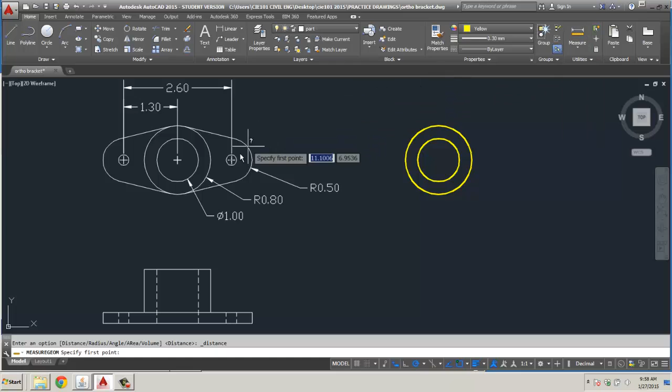They didn't put a diameter here, so let's measure it. Here's our measure tool - I can measure distance. From this corner to this corner is 0.25, so it's a quarter inch hole. Shame on them for not putting it in there.

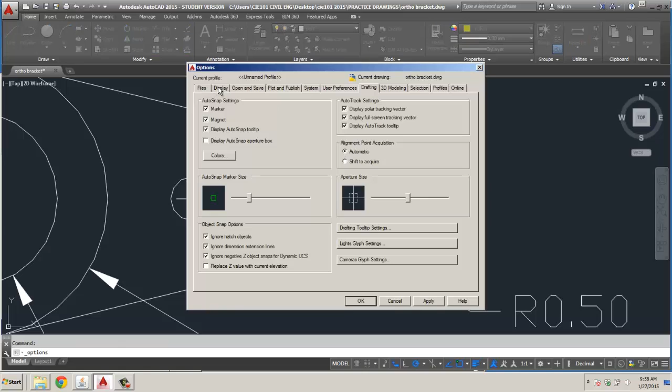You'll notice too that this is round but kind of chunky. If we right click and go to options, then drafting display, arcs and circle smoothness, change this from 100 to 1000. Now you can see this gives us a much smoother looking circle. So I'm just being fussy.

Circle tool again. This time we'll start in the center, let it settle. We're going over 1.3, so 1.3, enter, and our radius is going to be 0.125. Looks closer, but I'm going to assume it's right.

I'm going to do the same thing over here on this side. I could just mirror it, but 1.3, that's 0.125 for radius.

Now the next part of this is we're going to start using our trim tools and our tangent. So we'll make sure our tangent is turned on - we want to make sure we have that as an O snap, so these match up. Everything else looks good.

Take your circle tool again, and this one has a radius of 0.5. So I'm just going to draw a circle here at 0.5. Okay, draw another circle, just hit enter, 0.5.

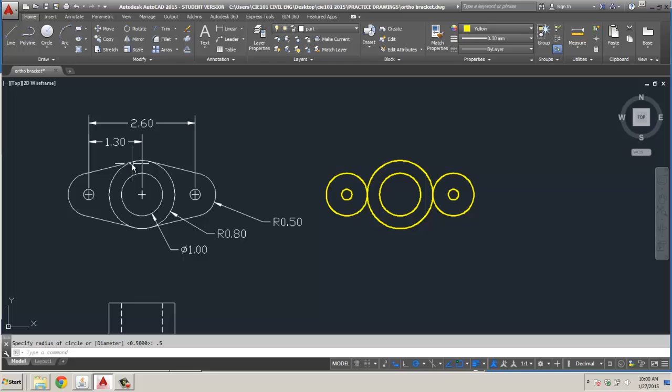Now we connect these with straight lines. So if I hit my line tool, I'm going to lock that onto tangent. Let's take off my center and just leave tangent - see what happens. There it is. So now we can just go bing to bing, because the only thing I've got it locked to is tangent.

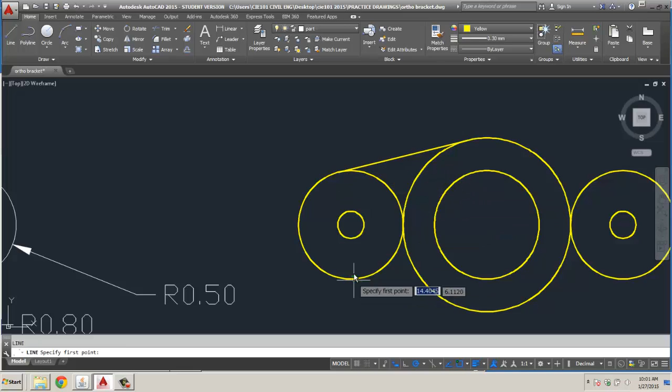Hit escape, hit enter, tangent to tangent, hit escape, and enter, tangent to tangent, escape, enter, and tangent to tangent, escape, enter. Okay? Doesn't look quite the same.

So let's just do our trim tool. I'm going to turn my snaps back on - center, midpoint, endpoint, intersection, perpendicular. I kind of cheated there, but now TR for trim.

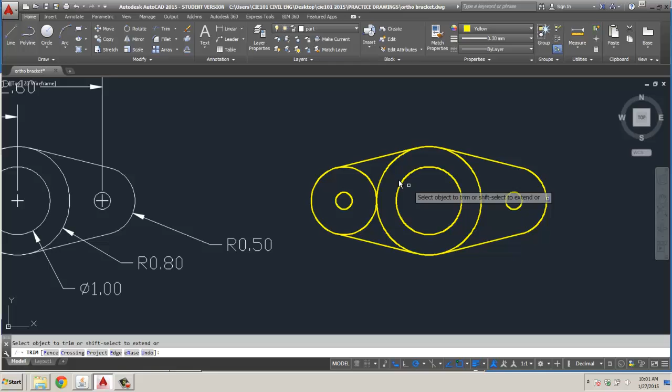Hit enter. I want to trim this, I want to trim this, I want to trim this, and I want to trim this. So it finds those endpoints and trims that out. So far we're looking pretty good here.

All right, so now let's put some dimensions in here. I'm going to go to my dimension layer, change this to my light blue, and let's go check our dimension settings right here.

We'll go to annotation, standard dimensions. Let's see if we've got any. We've got some mechanical stuff here that they've set up in this drawing, so we'll use that one. Let's modify it.

Symbols and arrows, center mark. Let's put this in at 0.2.

And text - color by layer, text style. That's all good.

Let's go with text color blue just to make sure. Don't want to fill. And our lines will be cyan and cyan.

Fit - we got inches at the end, so for primary units we'll just match there, so we don't need that inch mark on the end. If yours is like this, let's just see what it looks like.

Set as current, close. So now let's do a linear dimension from this center point to this center point at 1.3. Probably can just go with the by layer. Do that one again.

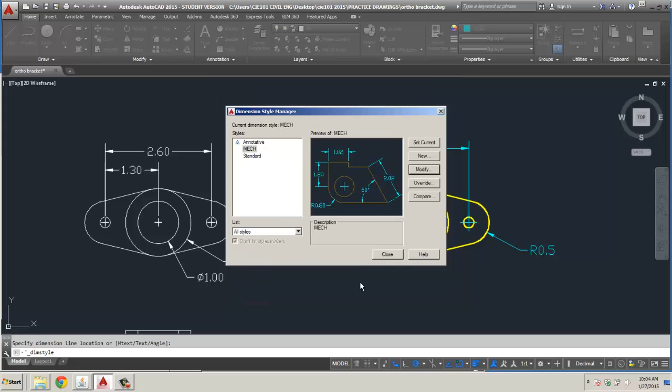Now this has 1 decimal place, so if we go back to our annotation properties for mechanical and modify that, we can change this now to 2 decimal places. And let's make our text just a little smaller, 0.18. Hit OK and close. It looks better.

So now we'll do our radius on this circle. Bring that out. Sometimes you can kind of line these up so they look a little neater. And we've got a diameter dimension for this one. Pull that one this way.

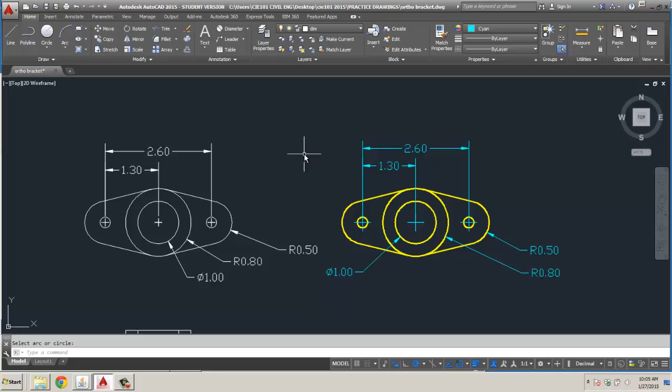Dimension center, we'll just put a center mark on that one so it kind of matches what we have over here. We'll go back to our part, change it back to yellow again. We can see that we have this front elevation of this piece.

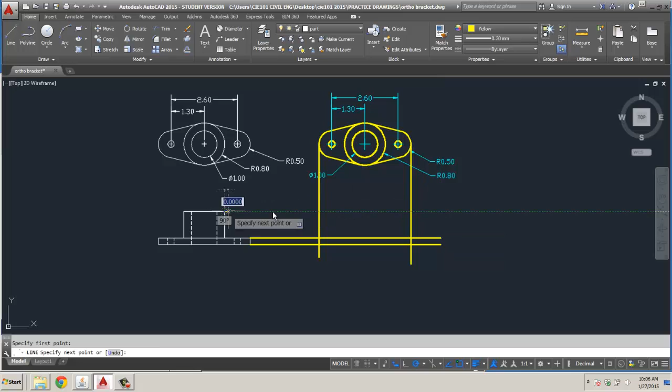This is a cylinder that sticks straight up. It's got some holes drilled through it. So to do this, let's draw some construction lines. You don't need to get all fancy on it, just draw these straight down. Don't worry that it's touching the ends, hit enter, and we're going to go straight down here. I'm just hitting enter to repeat my drawing. Bring that across, bring this line across.

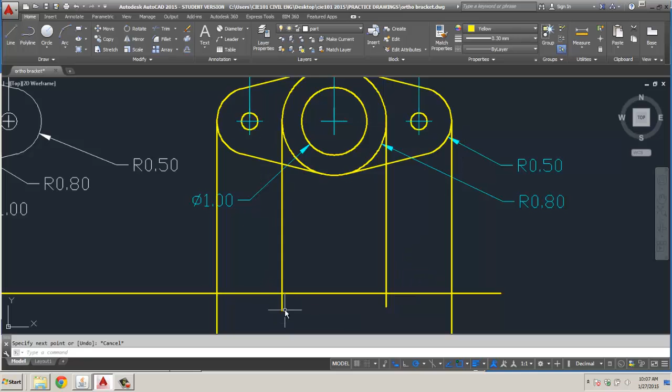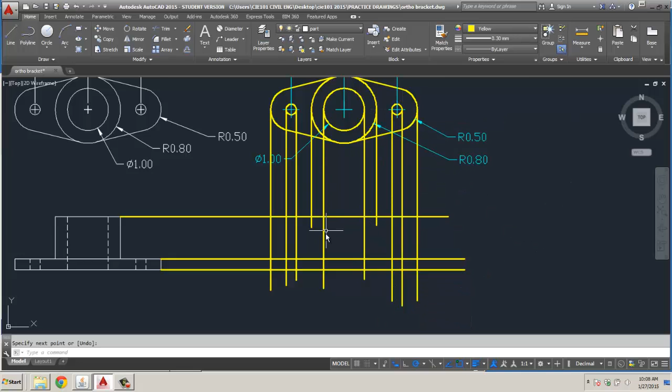We're going to come up here and find that edge. Let's just check off nearest. Find it. There, we'll pull that down. Pull that one down. Good, let's see, enter. And one more. I know, looks foolish, right?

Now let's trim these. So we'll trim the bottom first. I'm just going to type TR, enter, enter. We'll trim this to and this, this, and this, this, this, and this, this, this, this. And we can trim this, and this, and this. And hold down my shift key, trim that to this, not to that.

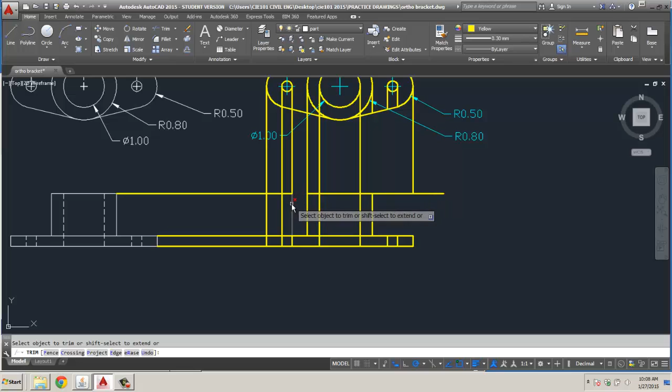Trim that off, that we don't need. Actually, I don't want you to trim that. Okay, makes sense. Hit escape, and then we can just left click on these lines that we don't need anymore.

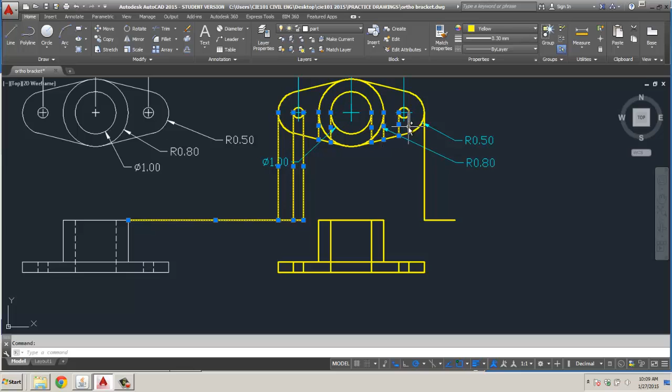That one you can just keep left clicking until you get all the lines you don't want anymore, and hit your delete key or erase them.

Now, some of these lines are dashed, so I'm going to change this back to the cyan color, or actually I use green. We're going to put a hidden line in. Now if you don't have a line that shows hidden or phantom, just left click here and go to load, and you can go down and find, there's a dashed line. Hit OK, and there it shows up. So we're going to say we want our hidden line, and I want this to be a little thinner on the screen anyway.

So if I select this one, this one, this one, this one, this one, and this one, and just come up here and say I want to change you to green, and I want you to be hidden, and I want you to be thinner. 0.18, hit escape, just like that. So these holes go all the way through.

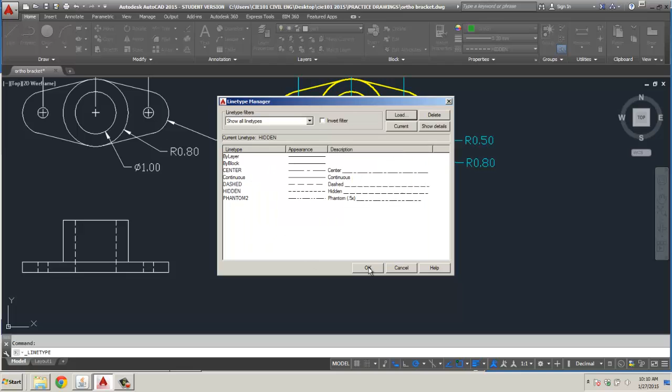What I will probably want to do now is I'd like to put in some center lines. I don't have a center line, so I'm just going to hit OK. I want to load, and then we want center line right there. Hit OK, hit OK again. Now I have a center line.

We're going to change our color to the light blue, and I'm just going to take my line tool starting right here. I'm just going to pull this center line down, hit escape, enter, pull this center line down, and make sure they're exactly the same length. So you just go over, kiss this one, bring it level back over, hit enter, and then select this and bring this down until it's about even back up to the top.

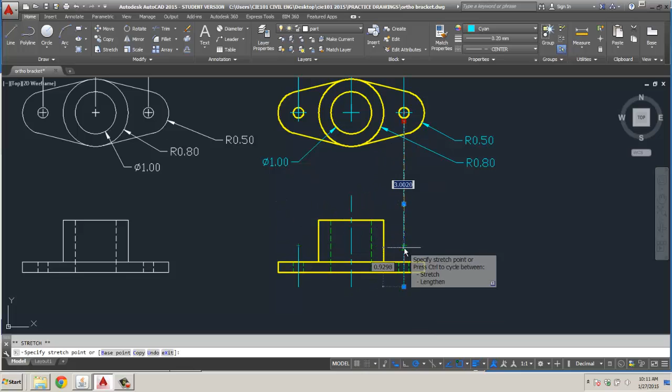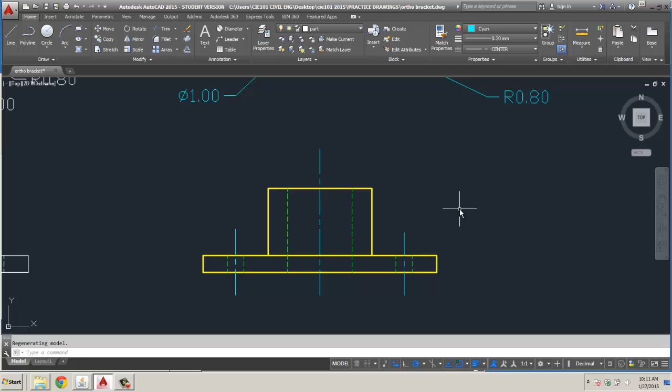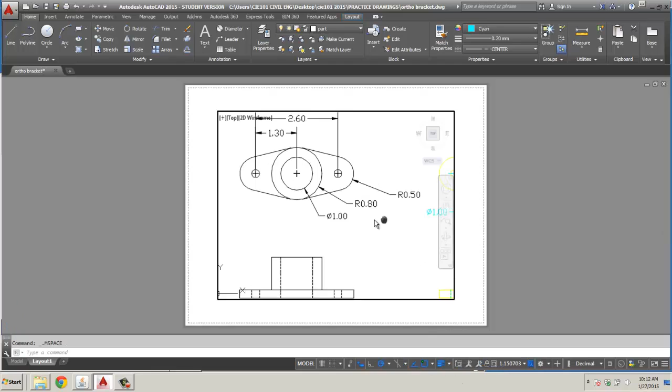Now, the next thing I want to show you, there's our layout, our viewport. You can see if I'm in model space, I can move over and put my view in here. It doesn't fit very good in this viewport. Now this is at full scale, so it's 1:1, I would say. We say 1:1 is full. Nope, that fits a little bit better. So that's actually a full size on an 8.5 by 11. But what about my title block that we created?

If we just right click on this tab down here and say from template I want to bring in a title block, and we'll just go back here, and there's my lab, there's my drawing, and it has a title block on it. Just double click on that. Yours may be looking for DWT, but I want my title block letter sheet, which is there.

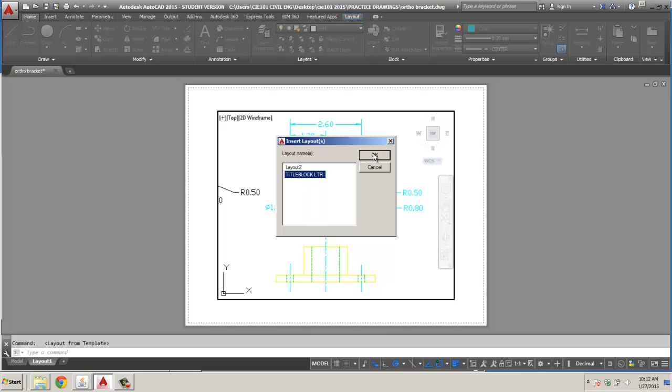I believe that's the one I want, so we'll hit OK. Now look down here at the bottom, there's the title block. I'll double click my mouse.

I don't see my part here, so I'm going to take Insert and create a viewport. Remember where to find it - View, Home... no, it's right here, Model Viewports. Layout - there we go, it's under Layout.

So we got a rectangular viewport, but I can also put in a polygonal one so it works around the outside of my title block frame at the bottom, so I get the most use of my space. I'm going to use this one and let it snap to these corners all the way around.

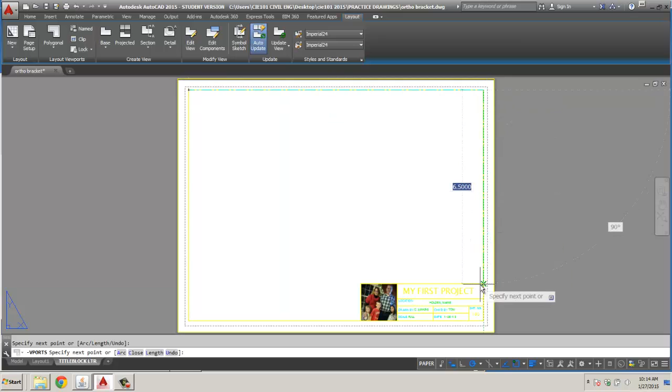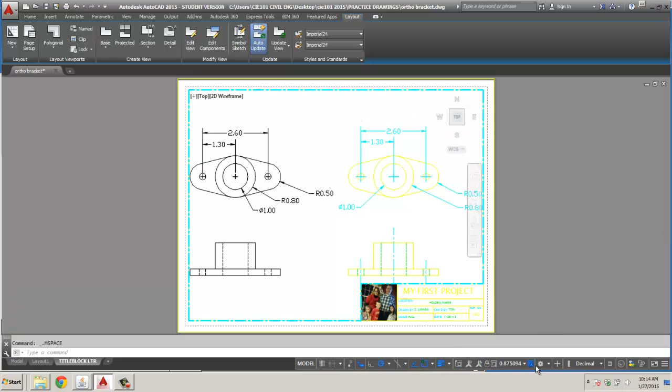And there it is, now I've got a viewport. If I take this viewport and go back to my paper space, I want that to be at 1:1 full scale. I'm going to move this over. I'll leave a piece of that one just so you can see what it looks like. And that looks okay.

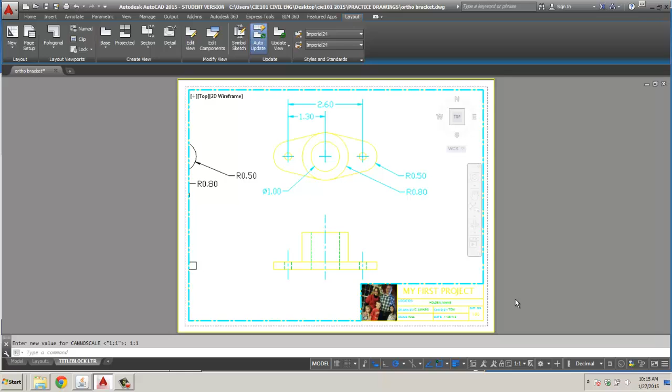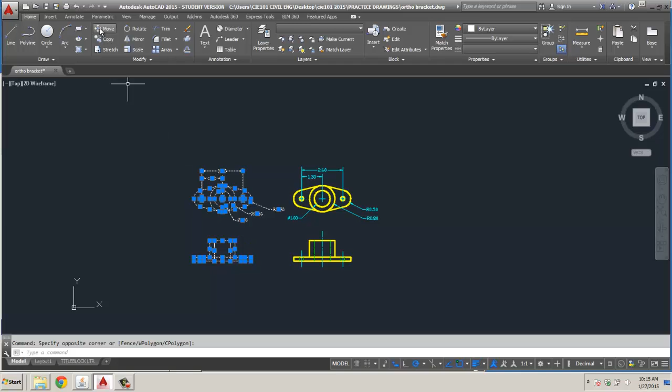Leave that just the way it is. I'm going to select Model or Paper, so now I can just move this around, zoom in and out. The paper allows you to do stuff without affecting it. So if I go back to my model, I want to move this stuff out of the way - just click Move, pull it over here. So when I go back to my title block, the other part of that disappears.

So we have this. If I wanted to print this out now, it's yellow and blue and it's all kind of crazy. So let's right click on our letter block and say Page Setup Manager, and we're going to modify this.

I want to add a pen table to it. We created one before, but I want to modify this one. So anytime I see the color red, I want it to go out as black with a line weight of 0.3. Anytime I see yellow, I want it to go out as black, 0.13. Color green will come out as black with a line weight of 0.09. Color 4 will be black with a line weight of 0.05.

And in the event we ever use color blue, we'll use black, and we want that one to be line weight 0. And then we have color 6 - not object color, I'm going to select a color, and I want it to be just a dark gray, so it shows up like a pencil, very light pencil, with line weight 0.

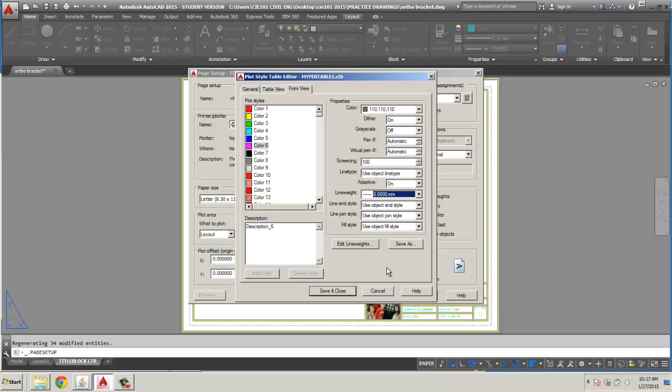So let's save and close. I want to print this out as a... let's see what we have. We'll go with Adobe PDF for this. And now let's preview it.

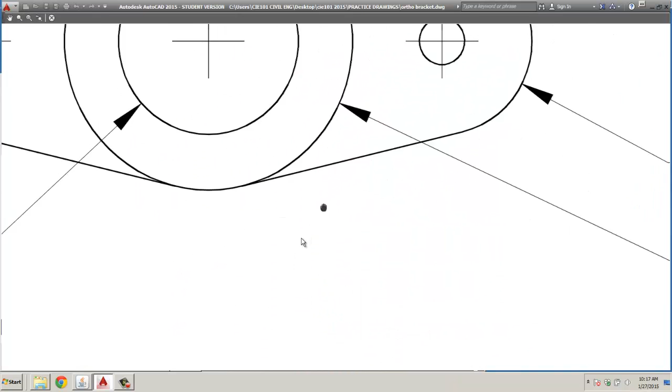Now if I want to change my title block, I can change this. So I'll call it Bracket. Sheet number will be M01. We'll put it down as Bangor. Scale is full, drawn by, checked by CJ - I check my own drawings - 128 will be the date, and hit Apply.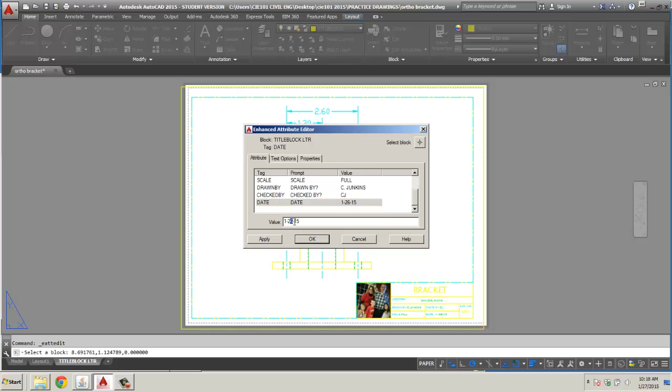So now my title block's been updated, my scale is all updated. If I right click now and just say Plot, it's going to ask me - it's going to plot to an Adobe PDF. I just say OK.

I'll put this in my assignments - I'm not sure what this is. Ortho bracket title block letter. I'll just call it Ortho Bracket PDF. Say save.

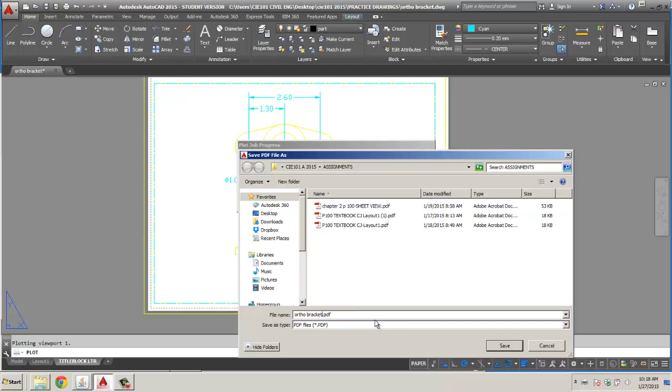And it'll actually open up my bracket - it actually shows it a little bit better now. If we take our document and rotate it counterclockwise, if I were to print this out now, we get this nice crisp line weight.

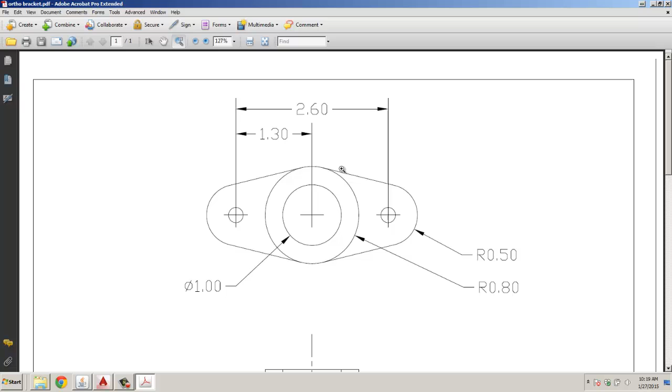You can kind of check it over, and the more you look at it, the better you can see that line weight. If you print this out, it'll actually look pretty cool. So there it is, a nice little practice drawing that you can use. I'll upload that along with this video so you can use this as a practice drawing.

There's a couple neat points about being able to import your template as a title block and being able to update it. I'm going to do another video, kind of a one-time thing, on the title blocks. I know some people had issues getting their title block to show up correctly, so I want to make sure we get that taken care of. Other than that, we should be good, so I'll sign off and let you have at it.